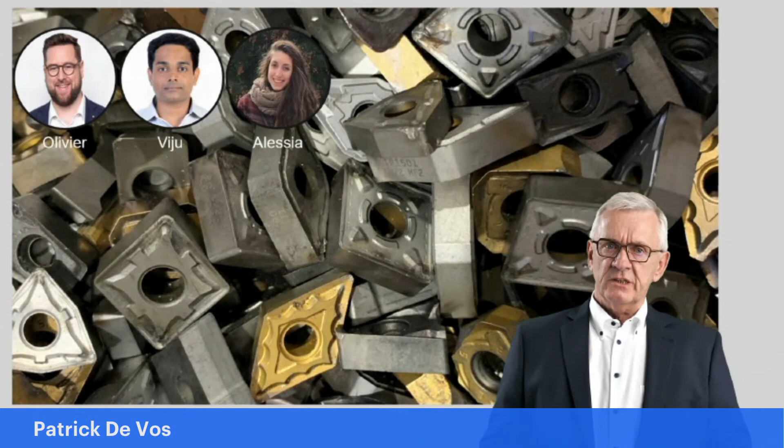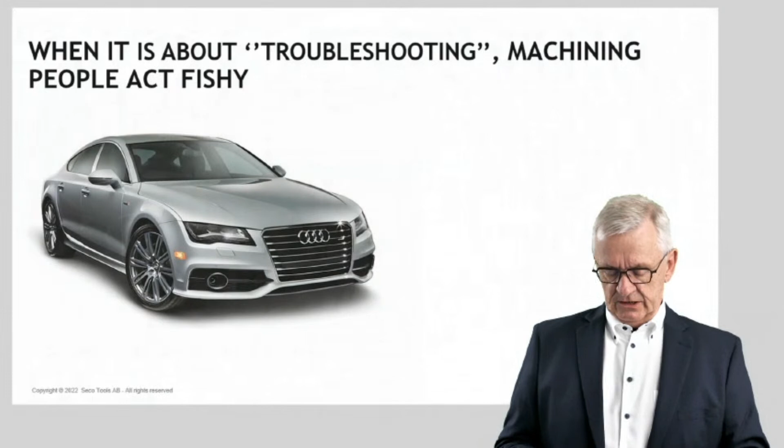Welcome at this session where we are going to talk about tool deterioration. Tool deterioration is under the umbrella of troubleshooting in machining. And when we use the word troubleshooting, machining people, they act a bit fishy, I always have a feeling. It's like we talk about a car, we need a car, and we discuss a car and so on, and then at one moment we reach consensus, we say, okay, this is what we think we need. And then machining people, they always say, yeah, but wait a second, before we take a decision, let's discuss troubleshooting.

And I find that so strange that the decision of what to use is governed by the supposition that we are going to have lots of problems. It's just something I want to share before we go into this. But I find it strange.

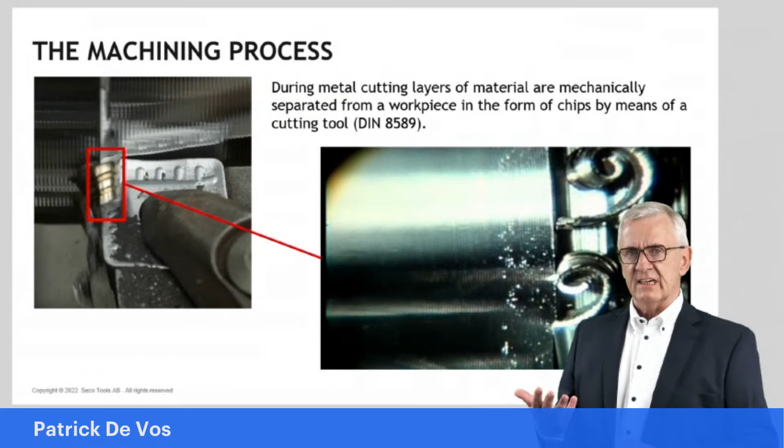Now the basis, we always go to the basis when we talk about machining. It's about the machinability model we use, and machining is a process where material is removed from a workpiece under the form of: we shear the material off, we deform it, and we shear it off. And this physical process, there are variables influencing this process, variables that are coming from the loads which are acting on a cutting tool, and there are other variables that give us an idea about the load bearing capacity of a cutting tool. And we work with those variables, we combine them, and we take into consideration all the different phenomena that we see appearing during a machining process.

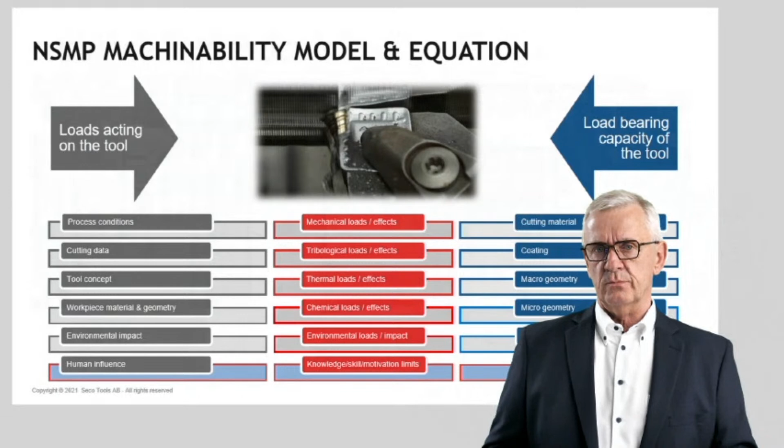You have the mechanical things and the thermal things, and having control over a machining process means having insight in these variables and also insight in the relation between these variables, how they relate to each other to end up in a final result, which is hopefully a well-controlled machining process. And in the end, asking the question, did I make the correct decisions? Did I solve this equation in a correct way?

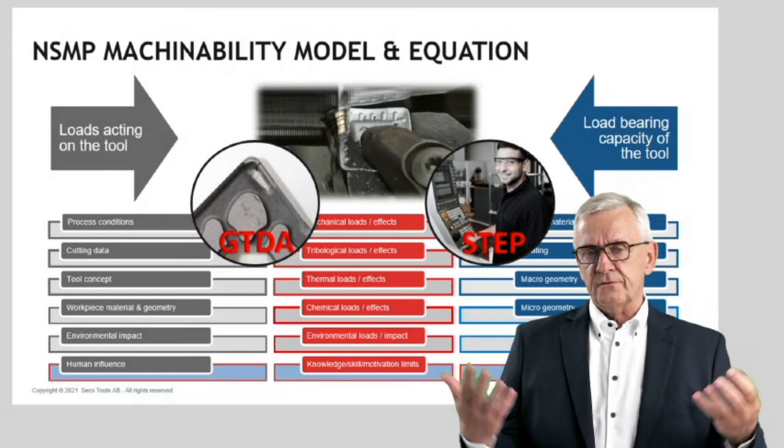In machining, that's pragmatic. In machining, we say, okay, look at the result, look at the tools after a while, how they look, at the workpieces, how they look, talk to the people that are there during the process, the operators that can explain what they observe during the process. And based on that, we decide, okay, this equation was solved correctly and it led to the wanted result, or no, we need to make modifications.

Now, today we are going to concentrate on wear, deterioration of cutting edges, which is a very critical thing in a sense that it tells us how the machining process took place. And we can learn a lot from that if we know what to look for.

Now, let me start by talking a little bit about deterioration, tool deterioration. What exactly is it? And in 30 minutes, of course, we cannot answer all the questions here.

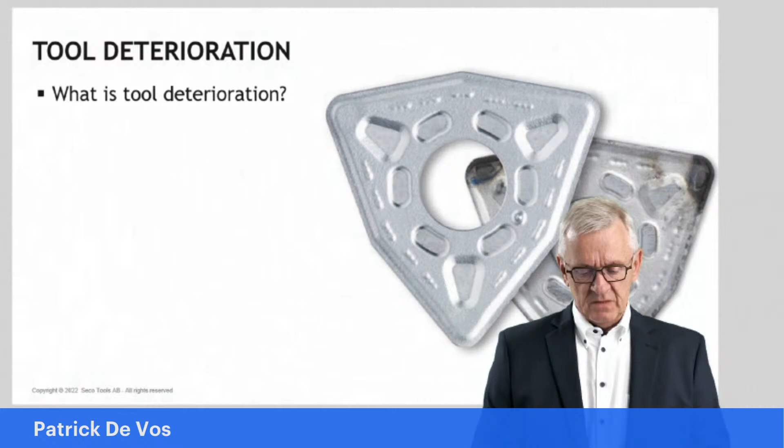What is deterioration? Deterioration is a physical thing, and it means that something loses the ability to perform in line with expectations. You can even bring it to humans. We also have physical capabilities, and those deteriorate. As we are getting older, our physical condition deteriorates. And it's a fact of life. That's a very important thing to consider here, because deterioration is normal. It's part of life. It's how it goes here on this world.

Of course, we have to be a little bit more critical than just saying it's how it is, because there are different types of deterioration. There are different deterioration things happening due to aging. People get old. Tools are being used and they wear out. That's aging deterioration. You also have sudden impact deterioration. Those are the things that happen suddenly.

You can break a leg. And that keeps you away from performing up to normal expectations because you broke your leg. You can break a cutting tool, and that also will end the lifetime of the cutting tool. But this has nothing to do with age. This has nothing to do with time. This is a sudden impact event that leads to a situation where we cannot perform anymore.

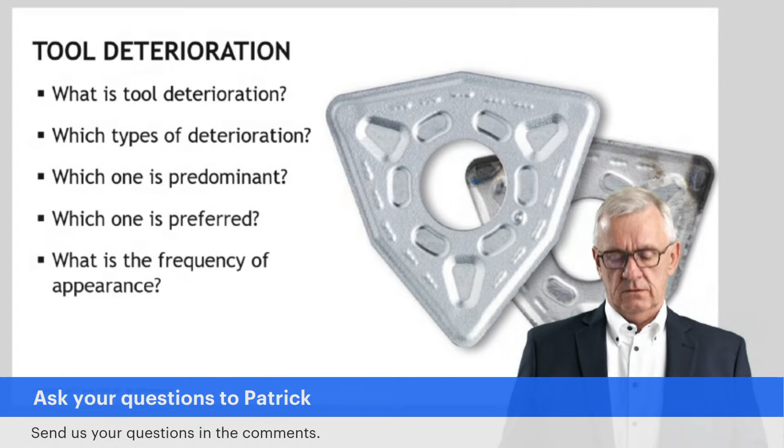And what's the frequency? Now, a broken tool is not nice. And people, sometimes they panic. They say, oh, I broke a tool, big panic, stress. Yeah, but does this happen just once, that tool breaks? Or does it happen structurally each time again? And those are two basically different situations. When it happens once by accident, don't make life difficult. If it's an accident, yeah, replace the tool and continue.

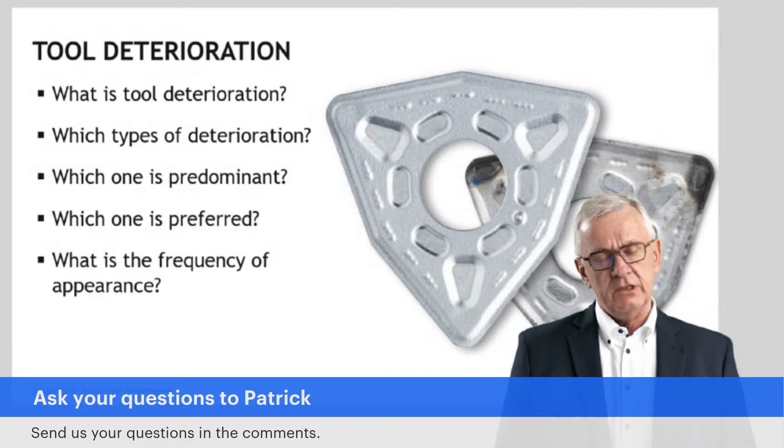If I go back to my comparison with a car, of course, sooner or later you will have a flat tire. There's no reason to panic. Just replace the tire and drive on. If, of course, every second kilometer you have a flat tire, you have another problem. So what's the frequency of the things you see? And what are the consequences?

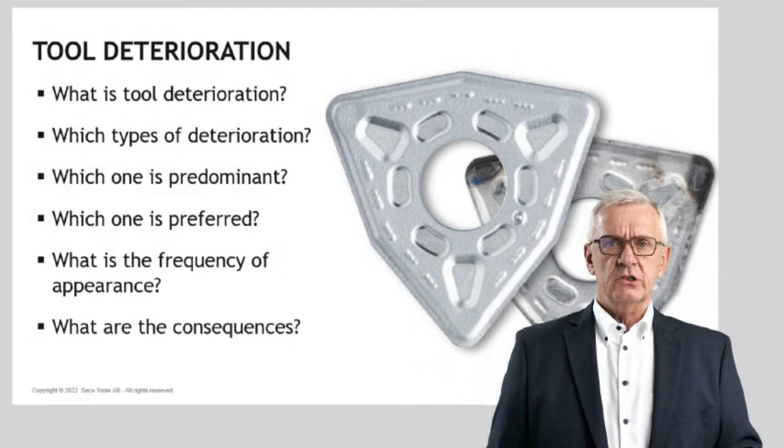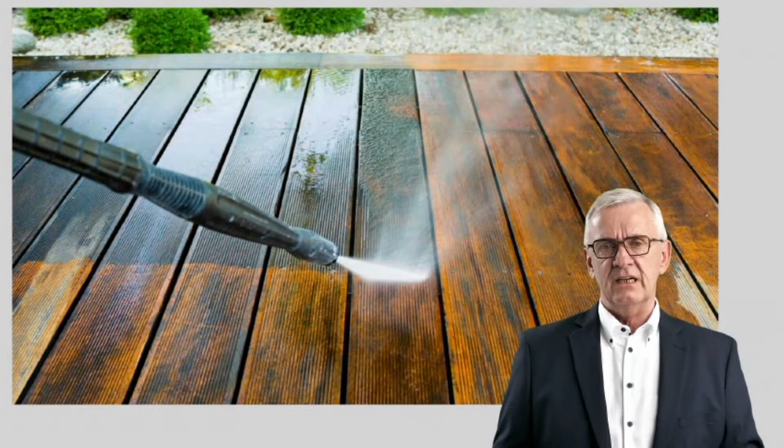Because we always talk about deterioration, and this is important, and we have to keep our eyes on it, and we want to manage it. But think one step further. If I see a certain type of deterioration, and I have all my discussions about, is this predominant, is this preferred, is this desired, what are the consequences of certain types of deterioration? These are basic questions. And the physics behind this, in a nutshell, as we have very limited time here, take the comparison of high pressure cleaning. Now, come. Perhaps you think now high pressure cleaning, what is this about? But I just use this as an example to let you understand what deterioration physically is.

You have a surface with a layer on. You have a floor with dirt on. You have a cutting tool with cutting material and a coating on. And you have workpiece material, in this example represented by the liquid which is used for the high pressure cleaning. That's your workpiece material. And you have geometrical factors. How you hold this thing is going to influence the result. And you have cutting conditions, you have pressure and the temperature of the liquid and the composition and all that type of stuff.

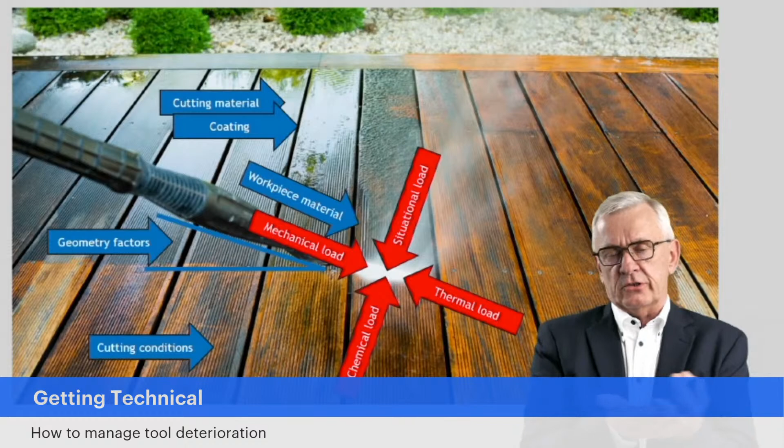And this leads to a situation where the two meet, the floor with the dirt and the high pressure liquid you use to clean, and there things start to happen. You have mechanical loads acting and thermal things are happening and chemical reactions take place and situational loads. And the result is that after the operation, your surface looks different. The surface is modified in structure, in shape, dimensions, composition, properties. You have a different surface.

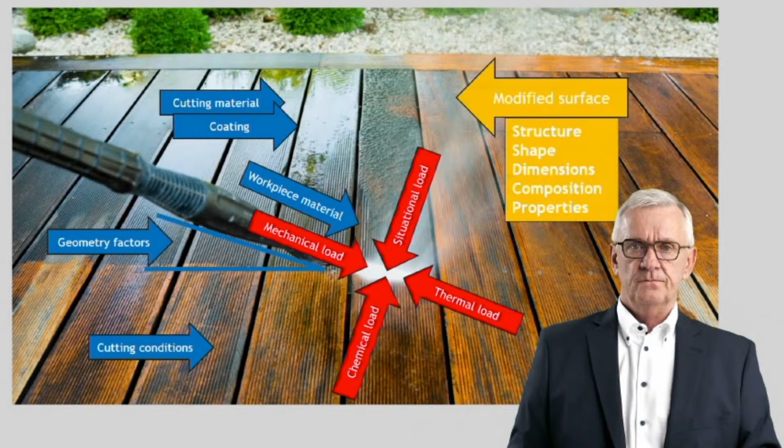Now back to my machining, it's exactly the same thing, you know. You have your cutting tool with a coating on and a material and a geometry, and you have the workpiece material, and the two are in contact, and where they are in contact, you have all these loads acting back and forth, action and reaction. And that leads to a number of things, but the thing we are interested in today is it leads to a modified surface on the cutting tool.

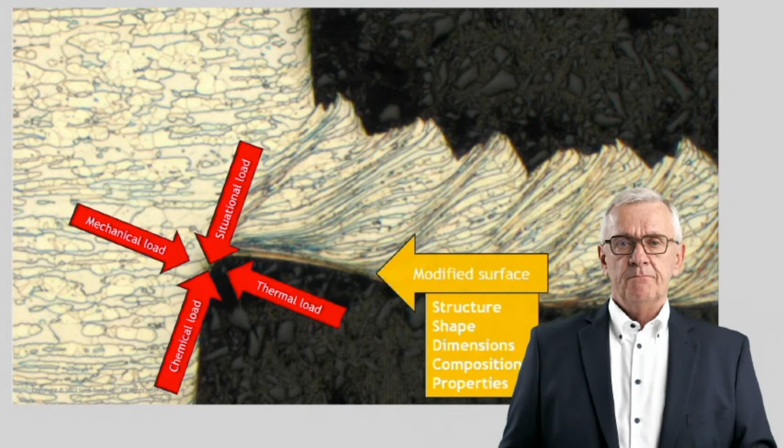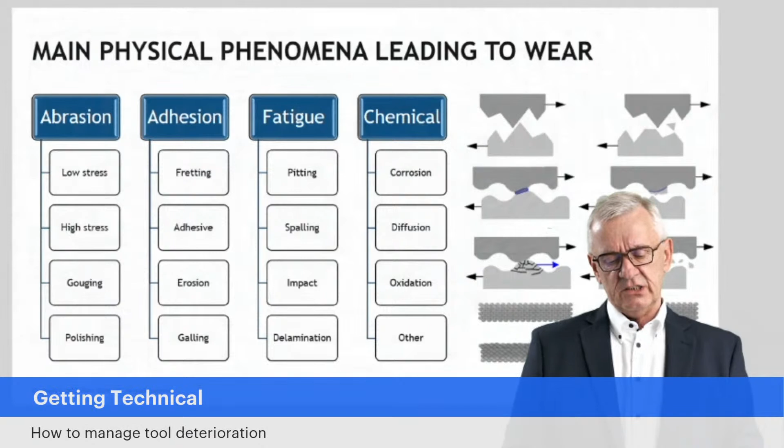We refer to that as deterioration, tool wear, if you want, if I concentrate only on the aging wear principles. That's it. Very short. I simplify a lot here, but basically that is what we are talking about. And that means that if we see this, it helps us to answer the question on why do we have deterioration? Why do we have wear? What are the physical things underlying this?

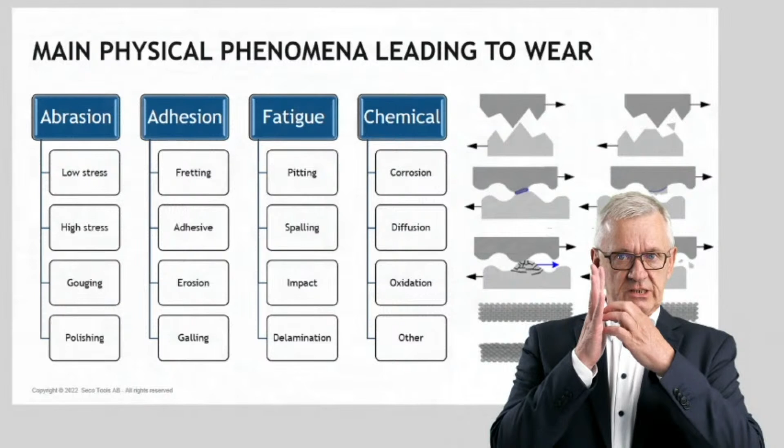Well, wear on a cutting tool, deterioration of cutting edges can be due to abrasive working. Abrasion as a physical phenomenon will lead to changed surfaces. It could be adhesion. Abrasion is the first one. Abrasion is, I sometimes say, if people say, what is exactly abrasion? It's a scratching effect. It's like with your fingernails, scratching on your hand. You scratch material away. That's abrasive wear.

Adhesion is that materials connect and the connection breaks after a while. And that breaking of a connection leads again to a changed surface of a cutting tool. Adhesion, and more in particular, adhesive breakage, is another physical phenomenon leading to wear on cutting edges. Fatigue: when you have a surface and you submit it to intermittent pressure, intermittent mechanical loads, you'll crack the surface and break little pieces out of it. That is fatigue wear, we refer to it.

And you also have chemical wear. You have different materials. You bring them together under certain circumstances of pressure and temperature and things. And there are chemical things taking place there. And those chemical reactions, again, will modify the surfaces. Chemical wear. And basically, when we talk about machining, when we talk about cutting tools, these are the four basic physical, chemical phenomena leading to wear.

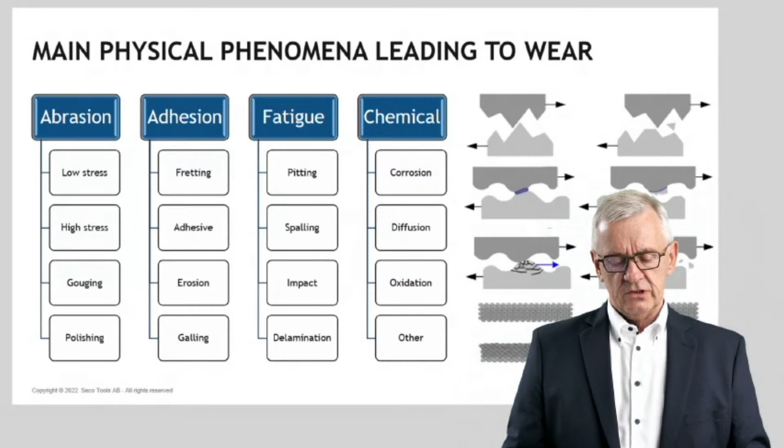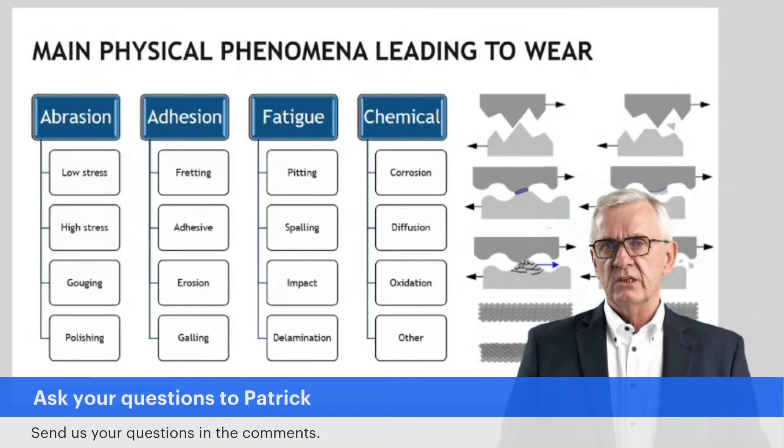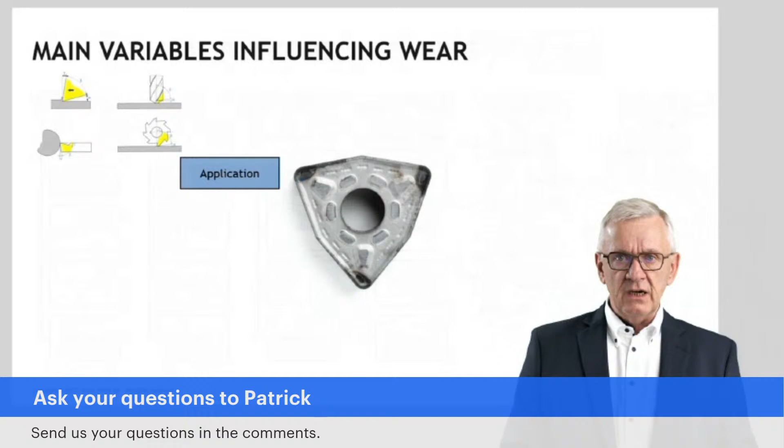And for me, always, if you see wear on cutting edges, for me, it's automatic. And I would like to invite you also to try to reach that stage that you make that automatic question of what was the phenomenon leading to this wear? Because if you know the why, and if you combine that with variables influencing those phenomena, and there are quite a lot of variables, but the main ones are the application. Do we talk about intermittent machining? Do we talk about continuous machining, turning, milling, that type of thing? Different types of applications lead to different types of wear and wear patterns.

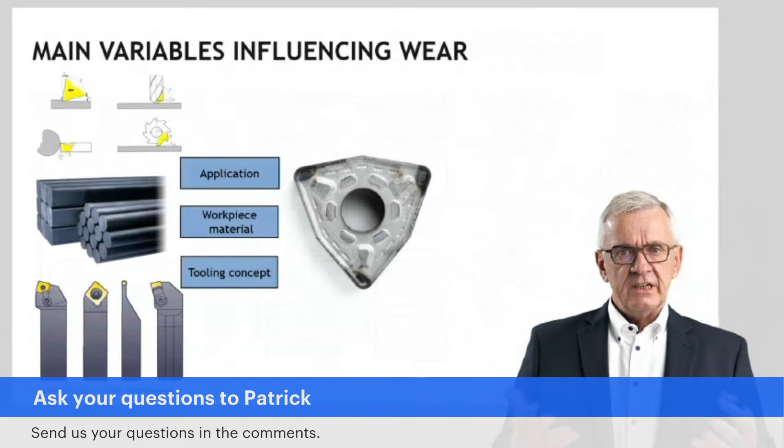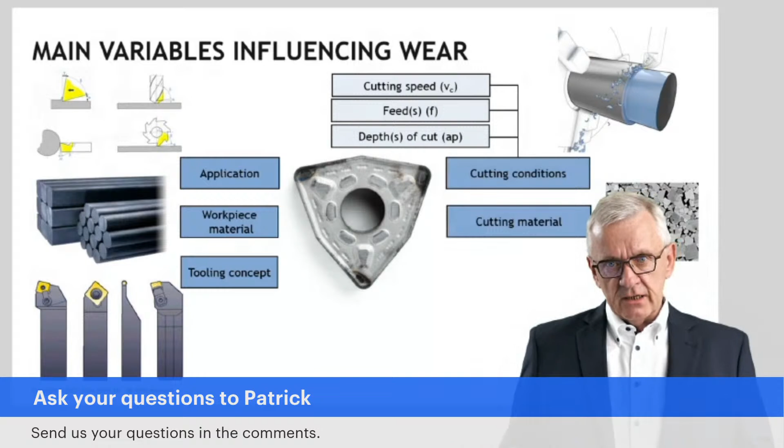The workpiece material, because think on the chemical things, when different workpiece materials are being machined, it could lead to different phenomena. The tooling concept. What is your overall tooling concept? Do you have strong tools? Do you have weaker tools? All of that is going to influence how wear develops on cutting edges. Cutting conditions, the conditions under which there is contact between the tool and the workpiece material. The cutting material, the opposite of the workpiece material, also an important factor. And the cutting geometry.

Don't underestimate the cutting geometry. People, when we talk about tool wear, they always concentrate on cutting materials, and very seldom they talk about cutting geometries. A sharp cutting edge is fragile and breaks easily. The geometry is an important factor. And this gives you an overview: if you want to manage your tool deterioration, this is information that you need. If parts here are missing, it becomes difficult. And even if you have all this information, you still have the butterfly.

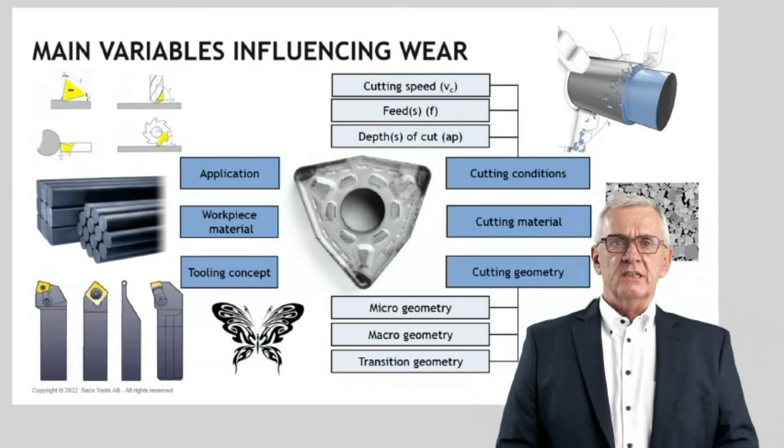What do I mean with butterfly? The butterfly effect. You will see that if you are in a situation and you think, okay, I control everything, I manage everything, I know what's going to happen, then something will happen that surprises you. I'm more than 40 years in this, and so often still it happens that I think, oops, I didn't expect this. And you know, in the physical world, everything has a reason, everything has a cause. And perhaps we forgot about it, perhaps we overlooked it, perhaps we misjudged it, but it's a very important thing in tool wear or tool deterioration management. It's the chaos effect. It's the butterfly effect that we have to be aware of.

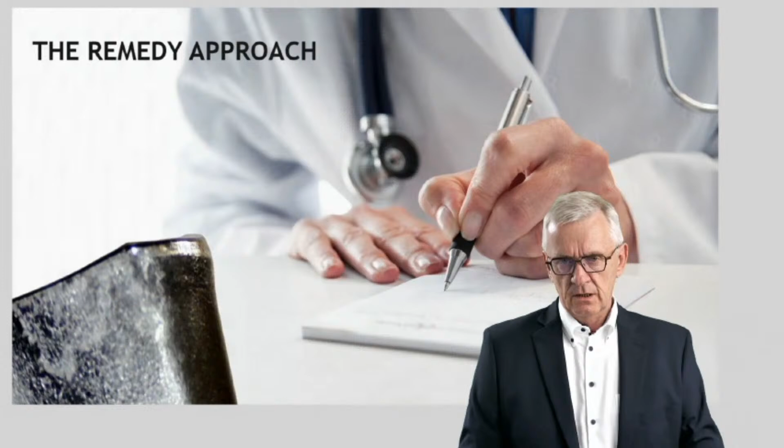Now, traditionally, when we talk about tool wear or tool deterioration, very traditional people always use what I refer to as the remedy approach. What do I mean with a remedy approach? People look at a cutting edge, they see something, and they start to write a recipe on how to solve this thing.

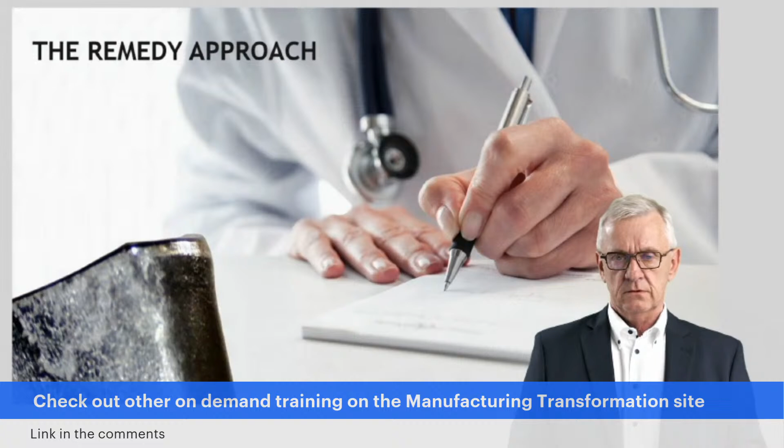And that remedy approach, basically we say, okay, if we look at wear, some of the wear we can live with. We prefer it because it's safe, it's controllable, it's predictable. We accept it's happening, it's a fact of life, but we manage it, we are on top of it. Other wear patterns are unpreferred because we cannot control them, not manage them really. They happen and they lead to situations which are out of control.

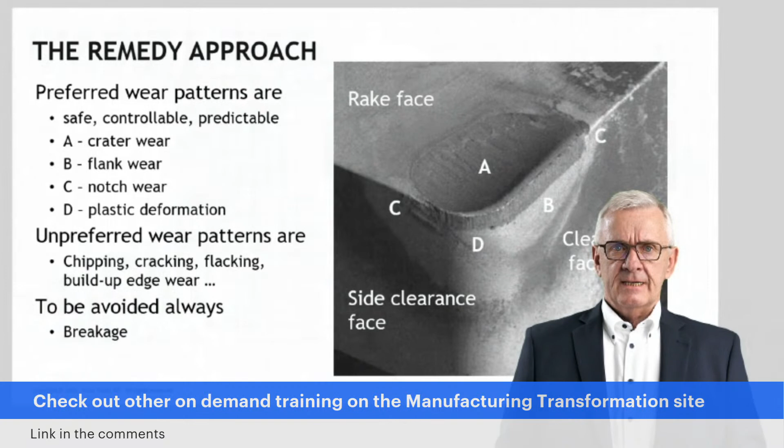A remedy approach is very strongly with this. It says, okay, mainly if I see wear patterns which I do not like because they are not safe, they are not controllable, they are not manageable, I should avoid them. And then the remedy approach starts: if you see this, do this; if you see this, do that.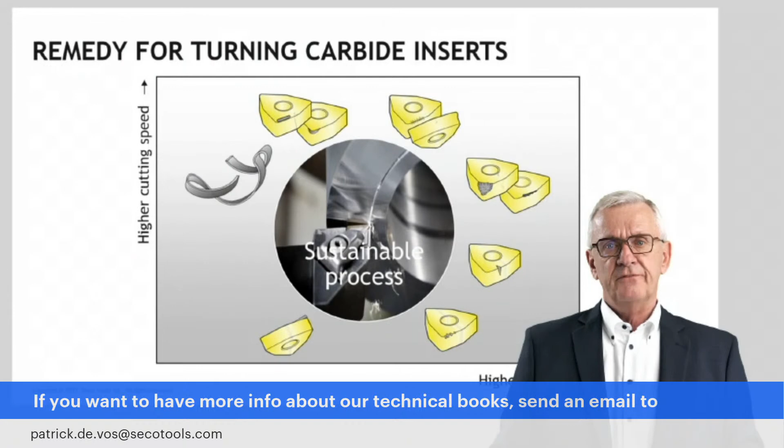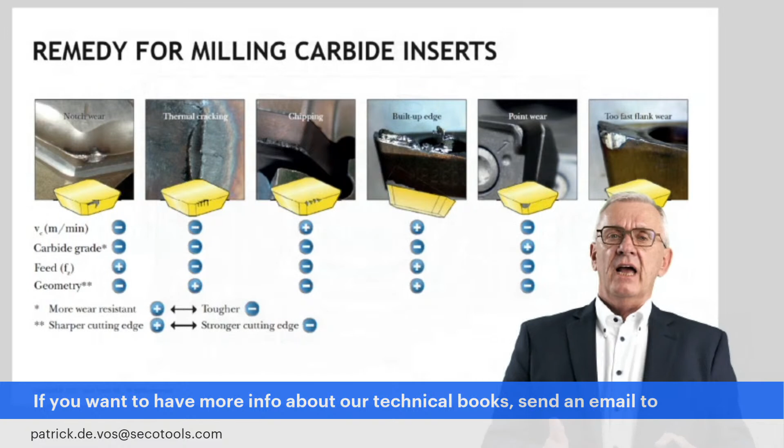And this you find under the form of written text, you find it under the form of pictures, you find it under the form of tables. Whatever, but it's each time the same thing. You see something, you observe something, and then you receive a number of instructions: do this, do this, do this, and then normally you see the wear disappears.

Now, I always wonder if people work like that, if they are curing the illness or easing the pain. You know, if you have a headache and you go to a doctor and you tell the doctor, I have a headache, the doctor can give you a pill so the headache goes away. That's easing the pain. A doctor could also say, yeah, why do you have a headache? And that's curing the illness.

And personally, I think that in tool deterioration, tool wear, we concentrate too much on easing the pain, the recipe method, here you have a pill. And we do not spend enough time in curing the illness. And that's why, a couple of minutes ago when I said there are some crucial questions to ask, crucial questions that have to help us to find out what is the illness.

And of course, we have to ease the pain. Basically, we should do both. But the illness, the cause, is very important, because all of this is very nice, but there is that little thing with reality that you think you are fully under control, you manage everything, and then suddenly something happens.

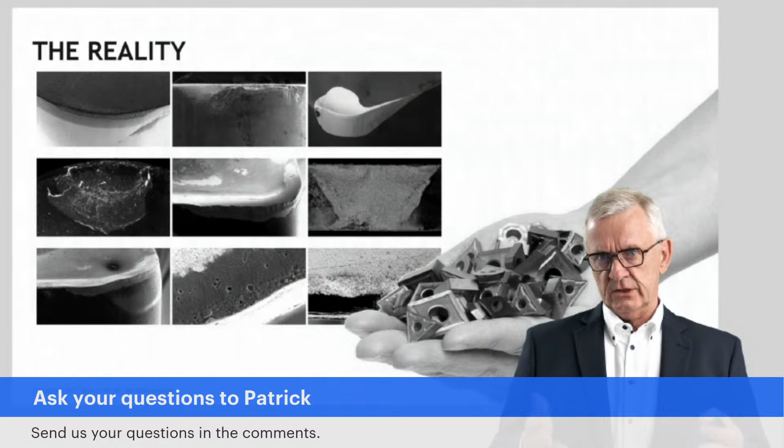And that's reality in machining when we talk about tool wear. Because if you look at used tools and if you look at cutting edges, you see that those cutting edges show a combination of wear patterns. And the remedy approach says, if you see this type of wear, do this, and if you see another type of wear, do something else. But if you look at reality, what you see is a cutting edge on which you see both. And then the question is, what do I do now?

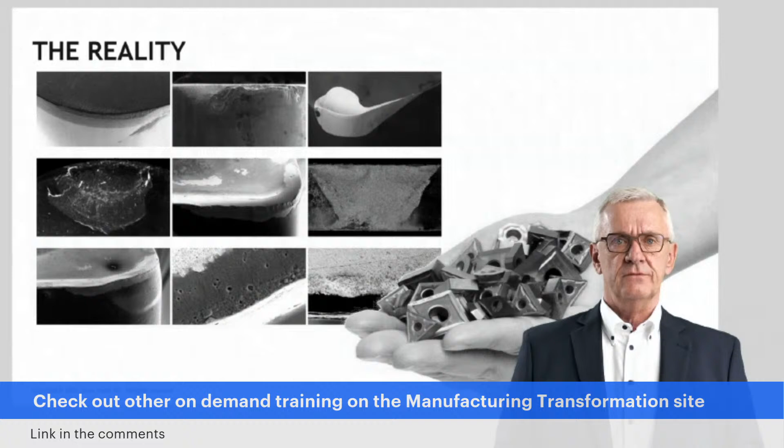And that's why it's so important to ask those questions from a couple of minutes ago. Which one is predominant? Which one in the end will lead to that you have to decide, I stop now? Which one is the one you prefer? Which one is the one you think is controllable? And so on and so forth. And that's the reality. And if you look a little bit, how big or how important is this reality?

What you see here is a very typical example, and situation by situation is different, but it gives us an idea. If you would take 100 used cutting tools and you start to evaluate what you see on the cutting tools, well, what you see is that roughly one third of them has singular wear patterns. I mean, only one wear pattern you'll find on a cutting edge, not a combination of different patterns, only one, and it's preferred. It's controllable, it's safe, it's manageable, and so on.

15% is singular wear, but not preferred, a wear pattern we say, oh, this is not nice because we cannot really control this. One out of five, you have mixed and unspecified: you see a mixture of wear patterns, but it's not very clear what exactly it is that you see.

You will see broken cutting edges. It's a fact of life. Cutting edges break, but it should be accidental, it should be an accident. If it's becoming structural, the broken cutting edges, then you have a structural problem.

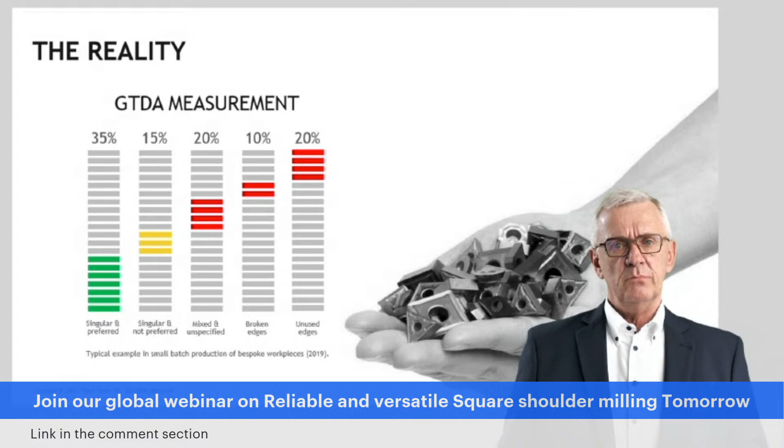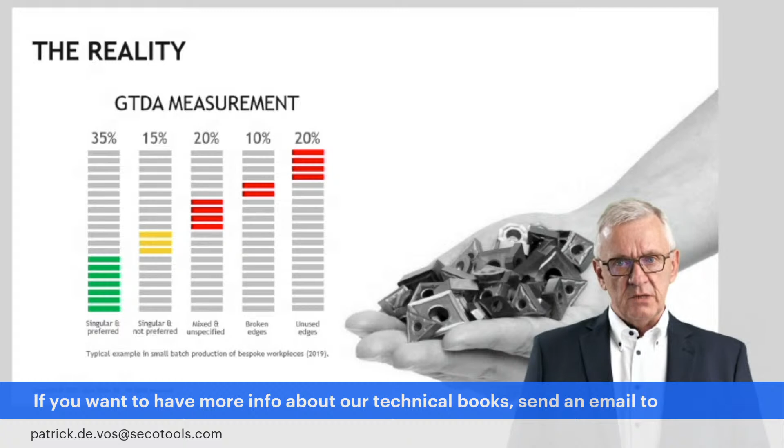Also very interesting, if you do an analysis like this, you see that a number of cutting edges are thrown in the bin of used tools, and they were not even in contact with workpiece materials. Why do people decide not to use a cutting edge? They spend quite a lot of money purchasing it, and then in the workshop they just throw it away.

I'm asking a lot of questions here, but the real important question we need to answer as good as possible is: when do we decide it has been enough and we replace the cutting edge? I go back to my car analogy. You remember, I said, okay, let's talk about the car. If we talk about cars, when do you change the tires of your car?

When is the deterioration so big that you think, okay, this is becoming unsafe, unreliable? And that's a very, very important question.

I could give you a very pragmatic answer. You have to change cutting edges 5 seconds before you see this as a result. This is a milling cutter that was used 5 seconds too long. The net result is what you see here. Now, that's very simple saying 5 seconds, because very important is how do you recognize you are on the edge of this event taking place.

And here we bring in the little sister of tool wear, called Tool Life. Tool Life is a subject we'll talk about next time. If you combine tool deterioration, tool wear, and tool life, then we end up answering this very important question. For today, I just put the question there.

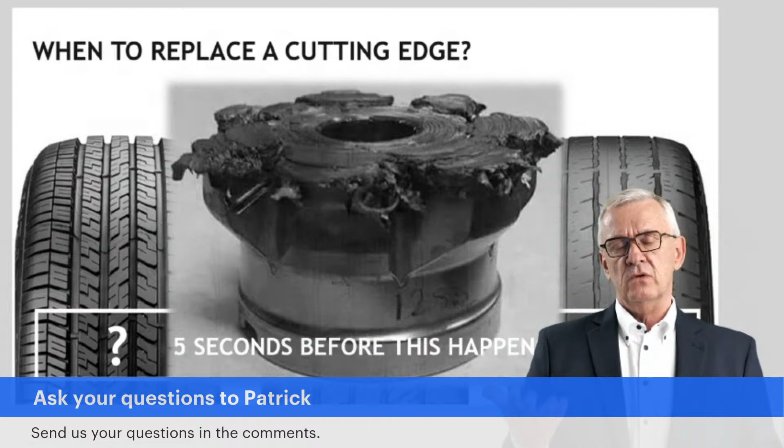I just ask you to think on it. When do you replace cutting edges? When is the moment that you say, now I change? A smart approach to this is you take a couple of steps here.

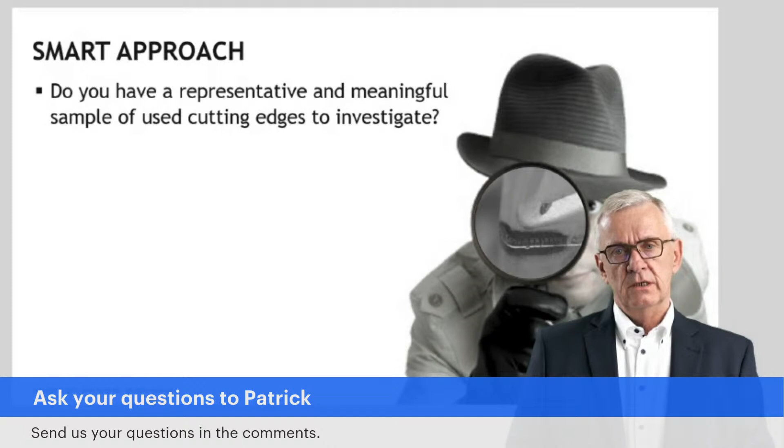The first step is, if you try to control your tool wear, don't concentrate on one cutting edge. Try to have a number of cutting edges that together are representative and meaningful to look at, so that you can have structural answers to questions.

Do you have all the information? Sometimes people show me a used cutting tool and ask me, what do you think? Yeah, what do I think? I see a used cutting tool, but is what I see good or not so good? If I don't have the information, the application, the workpiece material, the cutting conditions, I can't say anything sensible.

I can just say I see wear. What did you expect? Is what you see in line with what you expected? What did you desire? Is what you see in line with what you desire? Because again, tool wear, tool deterioration is a fact of life. In a big number of cases, it's not a problem. It's happening. In other cases, it's problematic.

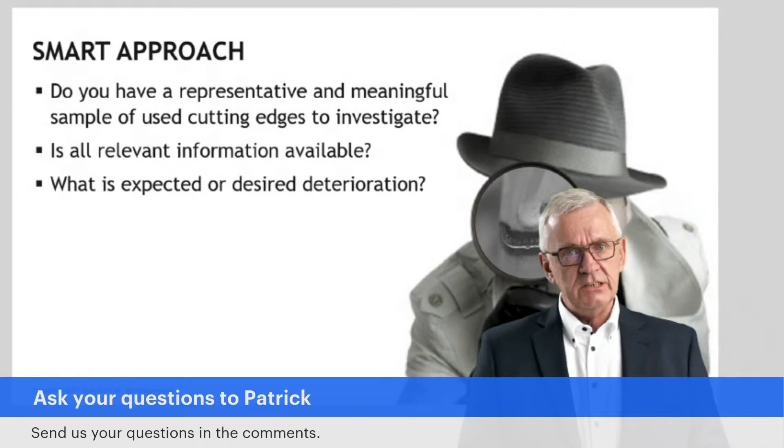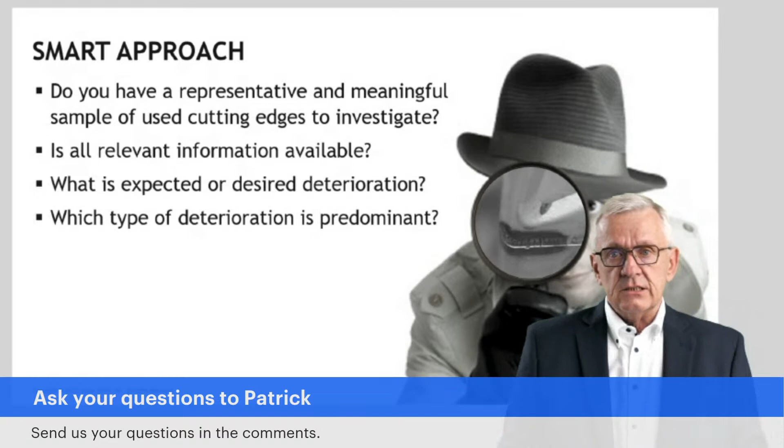If what you see in a structural way is not what you expected or is not what you desire to see, then you have a problem. Then we need to take care of that. Which type of deterioration is predominant? As I said, if you break a cutting edge, it's an accident. But if breaking becomes the predominant deterioration factor, then you have a structural thing on your hands. When it's sudden impact phenomena, tool breakage and things like that, ask: is it structural or is it by accident?

When it's aging, what is the main pattern? Because you will see that a number of them develop together. There you have to put your finger on the one which is the important one.

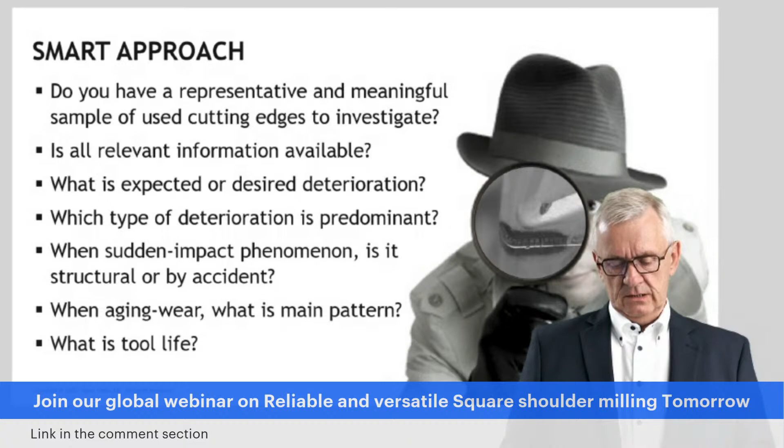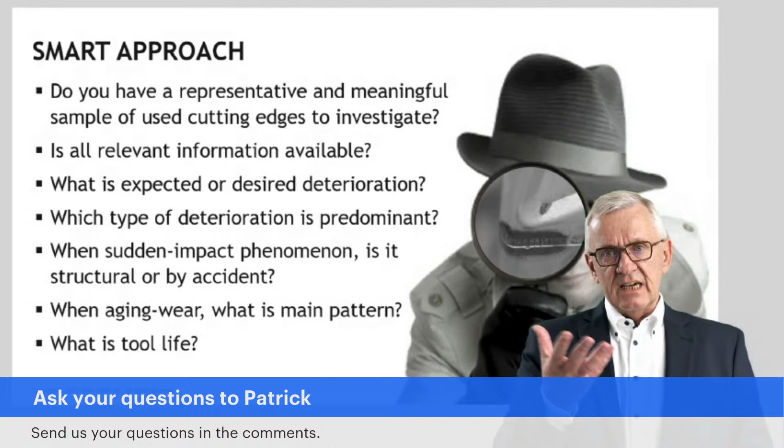And then the question that links to the subject of tool life, in all of this: how long did you use the tools? Because you can see a certain wear pattern and size of wear after 5 minutes, or you could see the same thing after 50 minutes. That time element is important in this context.

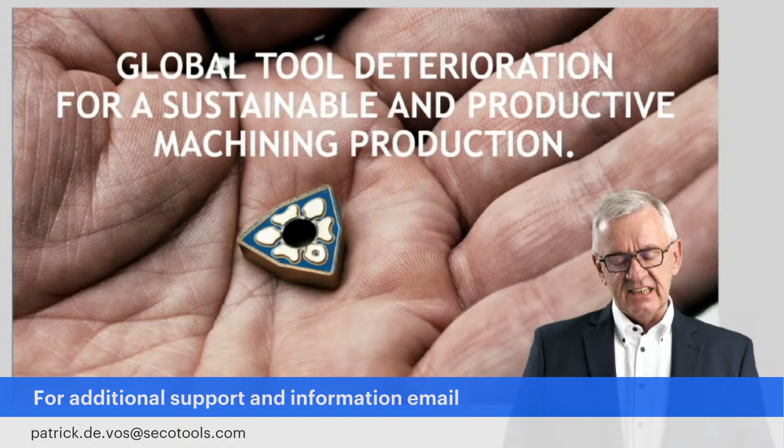When we start thinking like this, we developed an instrument. We refer to it as global tool deterioration analysis. It's based on that smart approach I just presented you, and it's an instrument that helps us create sustainable and productive machining.

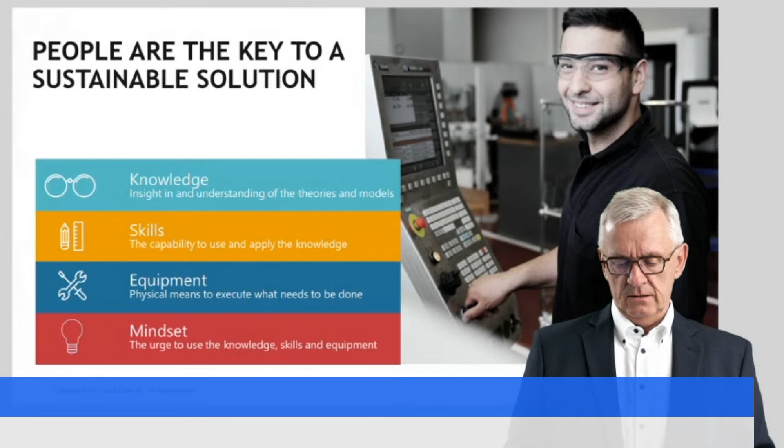Managing tool deterioration is perhaps the most important thing there is in machining when you look at the broader picture, wanting a sustainable and productive machining process. And the key for this is people. As I said, you remember my butterfly? Despite everything, you'll see things taking place that you think, oh, I didn't expect this.

To take care of that, we need human creativity, or insight based on knowledge. What exactly is going on here? Based on skills, do I know what to do to work with something based on available equipment? Because a workshop is not the cleanest place, and often not the place with the best lighting, and cutting tools are little, so you have to look. Equipment is important, and knowing how to use the equipment.

And the mindset. Do you dare to take responsibility in a certain decision? Because you will have to take a decision. What is the predominant wear? Is it flank wear or is it chipping? Well, which one? So you need to take your responsibility there.

And for me, when we talk about tool wear, I see big potential for what people refer to as digital machining, but that's another subject. For the time being, it's people that will be the main factor in all of this, and knowledge. And as I said, in 30 minutes, I can just ask the questions. I invite you to consult specialized literature, participate in master classes we organize on this subject. Knowledge is power here.

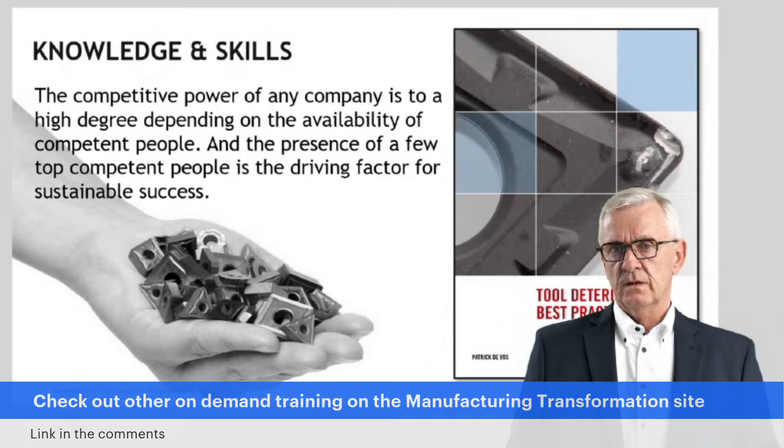I talk here in general, but perhaps interesting for you to know, because one of the informations you need if you talk about tool wear is the information of what's the application. Tomorrow there is a webinar, and if you are interested in wear in milling application, you are very welcome to come and listen to my colleagues talking about these things, because I treated wear here in a very general way, but wear is important enough. It deserves that it's put in certain context. What is wear in turning, and what is wear in milling, and what is wear in drilling, and so on.

In a very short time, we talked about managing tool deterioration. I started by saying, okay, what do we mean with tool deterioration? Why is it taking place? What do we need to know to be able to control it, to manage it?

Be careful, it's a little bit a waving finger I have here. Be careful with the recipe method. Be careful that you concentrate on easing the pain and forget to cure the illness, because then it's going to be a never-ending story. And if you really want to work with it in a structural way, I would say use a smart approach.

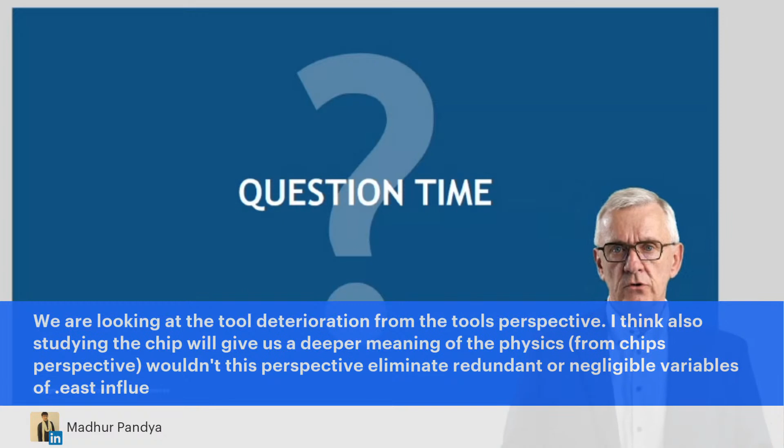When you use it, whatever we use in this world wears out. It loses the ability to perform like it was new. So, of course, we all want to get old, but how? That is the other question.

You have to see preferred tool deterioration in such a way that we accept there is tool deterioration, but there are different types, and some are more preferable than others, because some give us more ability to manage them, keep them under control, predict what's going to happen, and create a process which is sustainable in time. You have to see it like that.

So indeed, there are preferred tool deterioration patterns. For those familiar with this, normally flank wear, crater wear, plastic deformation, and to some extent notching, we like to classify as preferred tool wear patterns, because to some extent we can control them. We can plan, work with, and influence them. While other wear patterns, think on chipping, flaking, things like that, we don't have enough insight today to say we manage or control them.